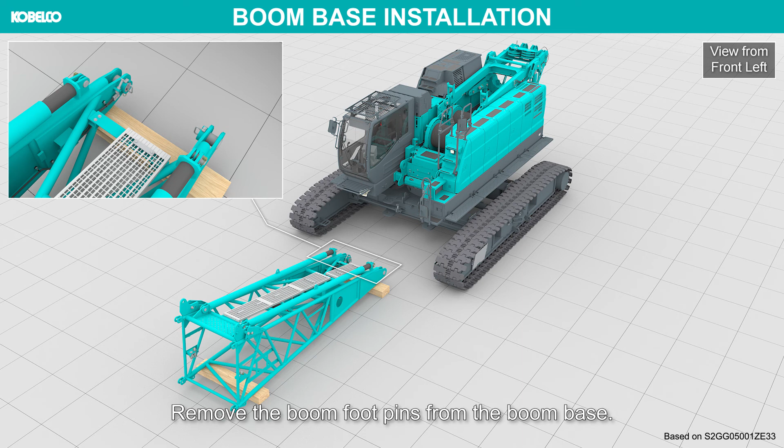Boom base installation. Remove the boom foot pins from the boom base. Apply grease to the boom foot pin holes. Confirm no foreign particle on the pin and pin hole.

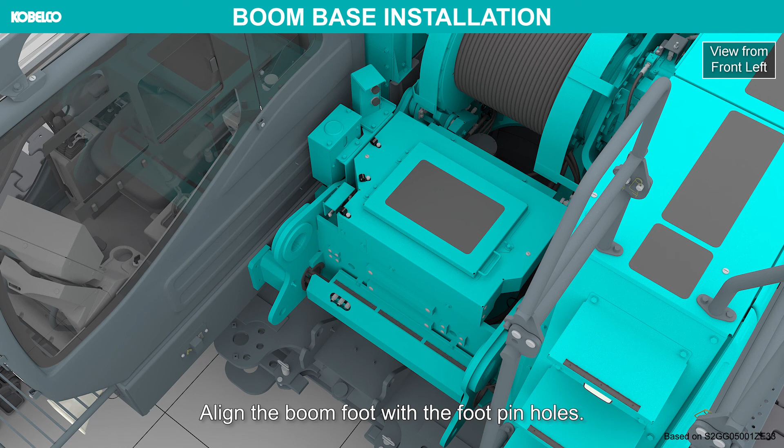Attach the slings to the boom base. Lift the boom base and move it to the base machine. Align the boom foot with the foot pin holes. Insert the shims to the boom foot. Do not use a hammer to insert the shims.

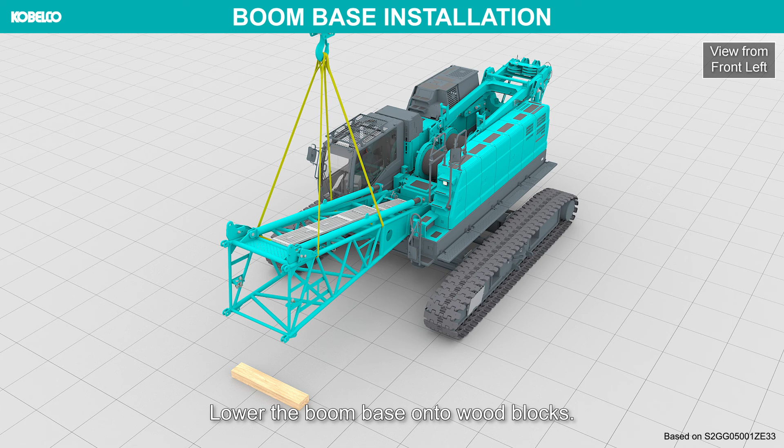Insert the boom foot pins, followed by the securing pins. Lower the boom base onto wood blocks. Grease the boom foot pins. Connect the cables of the boom base to the junction panel on the upper machinery. Shut the engine off before connecting the connectors.

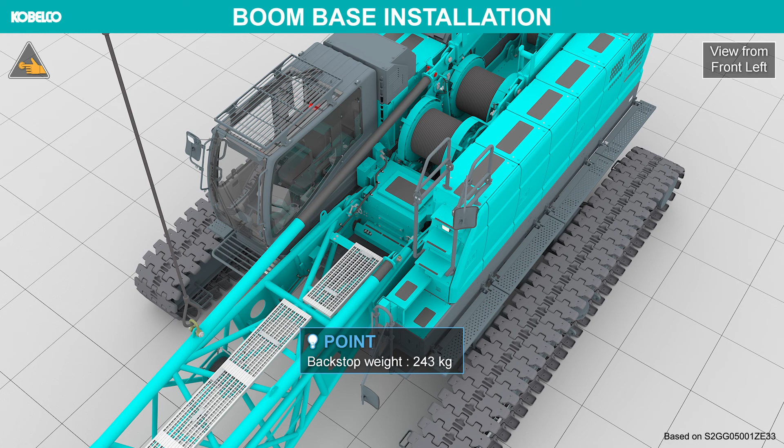Lift and hold the backstop with the assist crane, and remove the securing pins. Pull out the backstop and couple it to the swing frame. In the same way, connect the opposite side backstop. Set the upper spreader on the gantry.

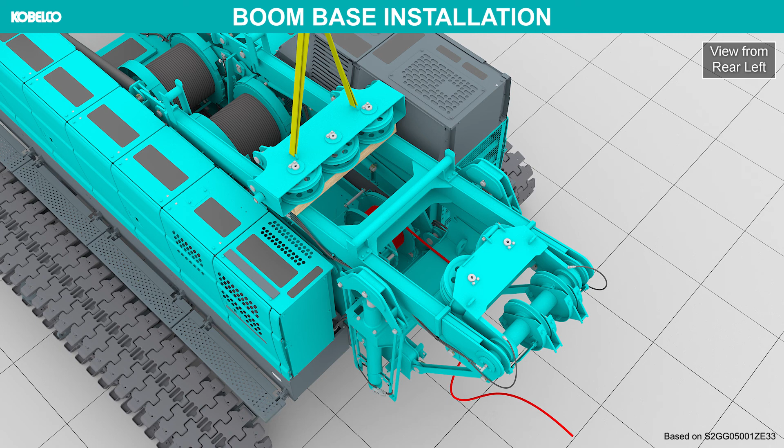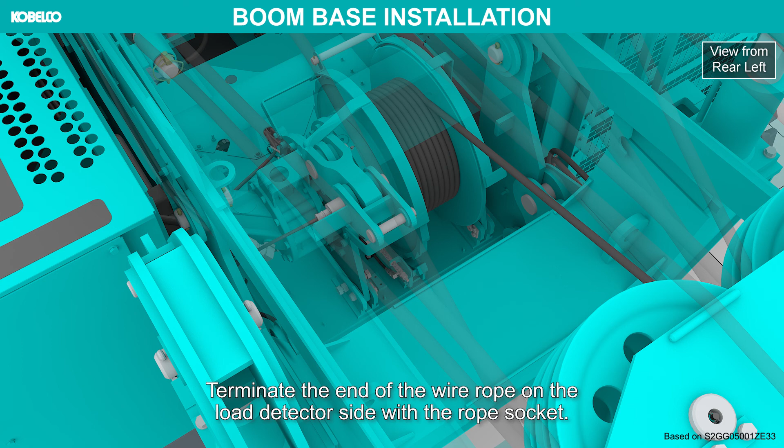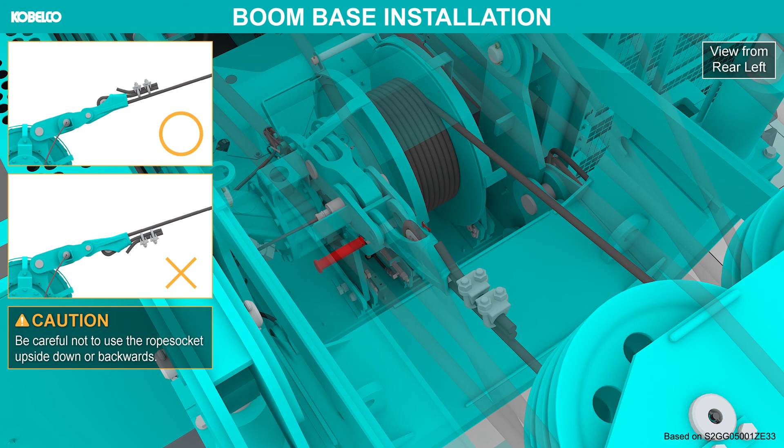Pay out 30 meters or more of the boom hoist wire rope. Be careful not to dirty the rope. Reeve the boom hoist wire rope. Reeve the wire rope in the proper sequence. Terminate the end of the wire rope on the load detector side with the rope socket. Be careful not to use the rope socket upside down or backwards.

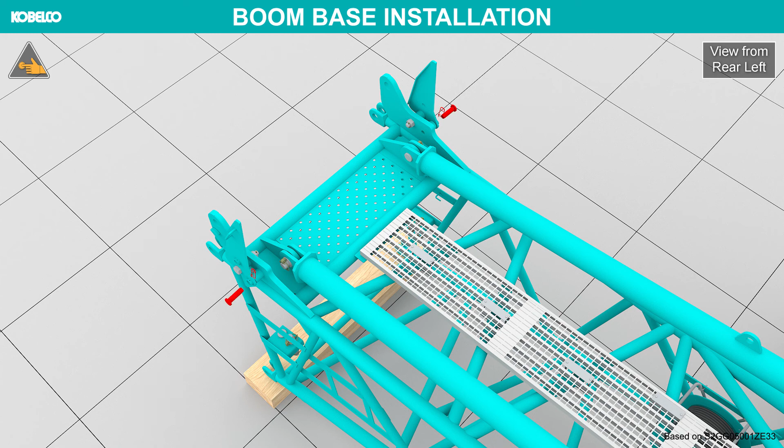Raise the spreader guide. Operate the boom hoist drum with the upper spreader suspended directly above. Operate the boom hoist drum carefully so as not to cause rough spooling. Move the upper spreader to the spreader guide.

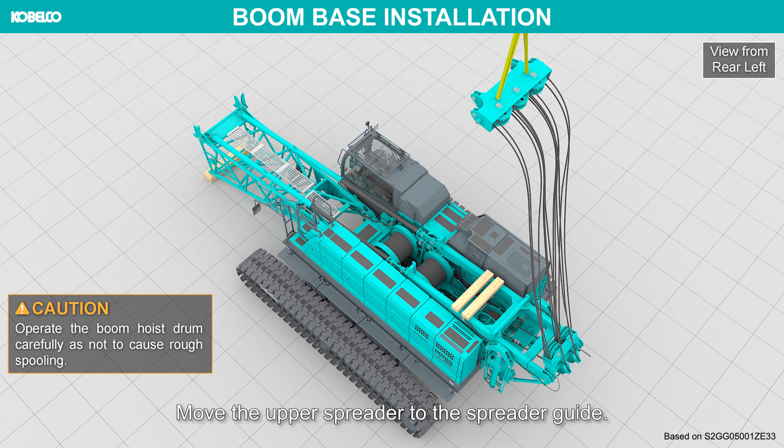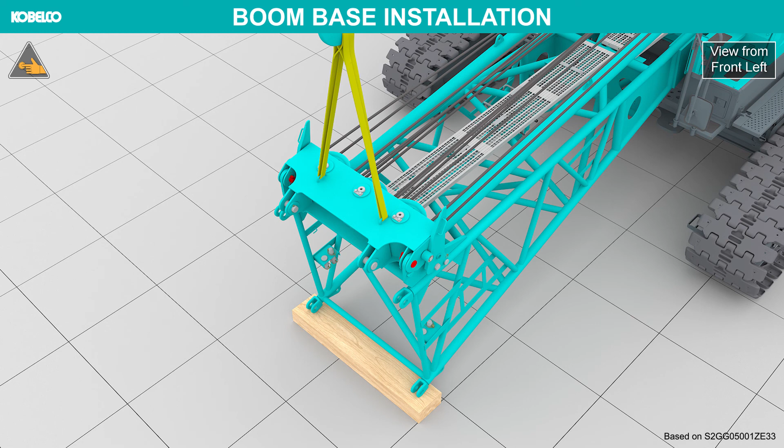Remove the securing pin. Use the spreader guide to stow the upper spreader and insert the securing pins. Detach the slings.

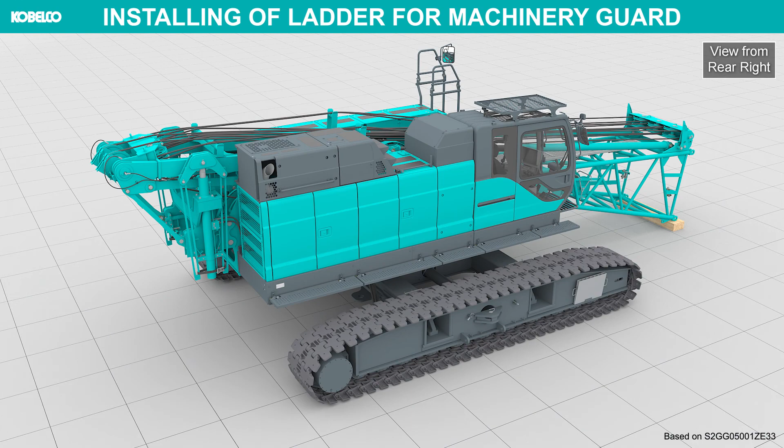Installing of ladder for machinery guard. Insert the ladder in the pipe on the machinery guard, then turn the ladder towards the upper machinery. Insert the securing pins to lock the ladder in place.

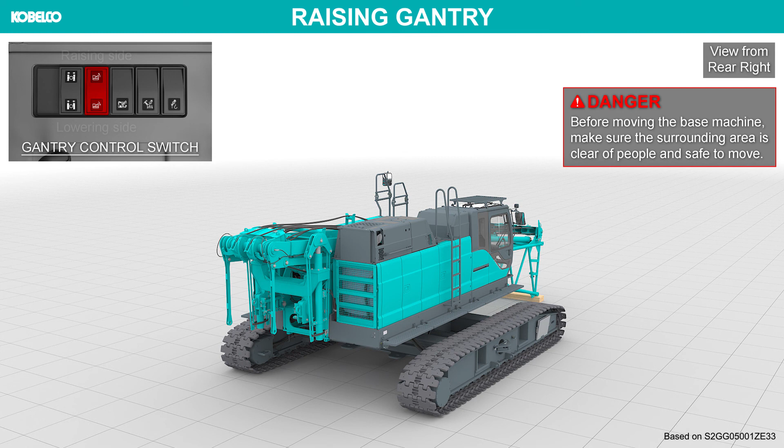Raising gantry. Remove the securing pins to free the links. Before moving the base machine, make sure the surrounding area is clear of people and safe to move. Operate the gantry control switch to raise the gantry.

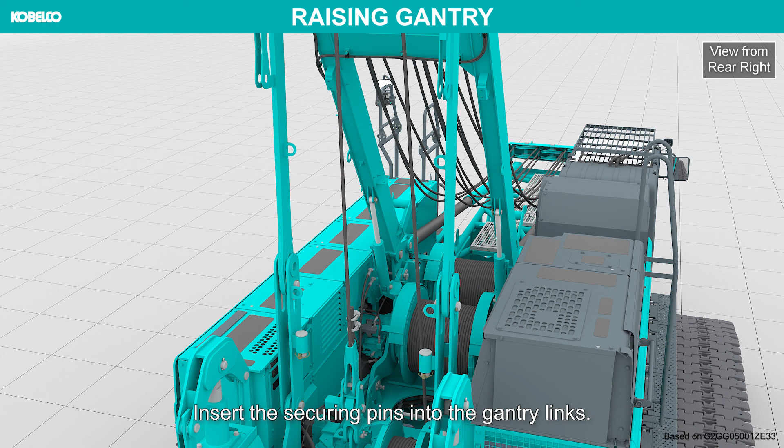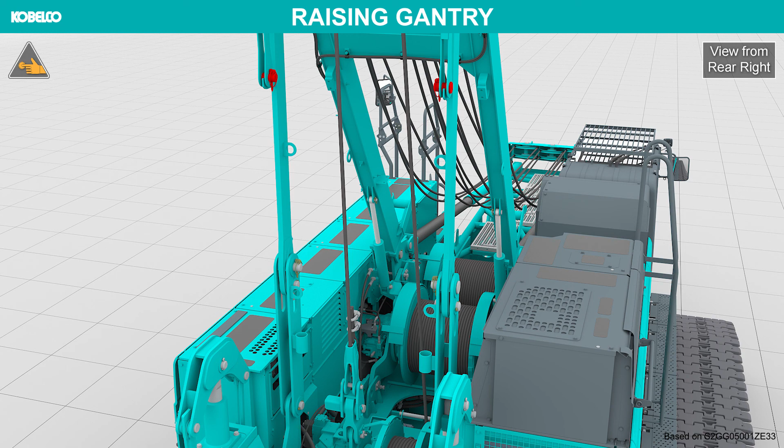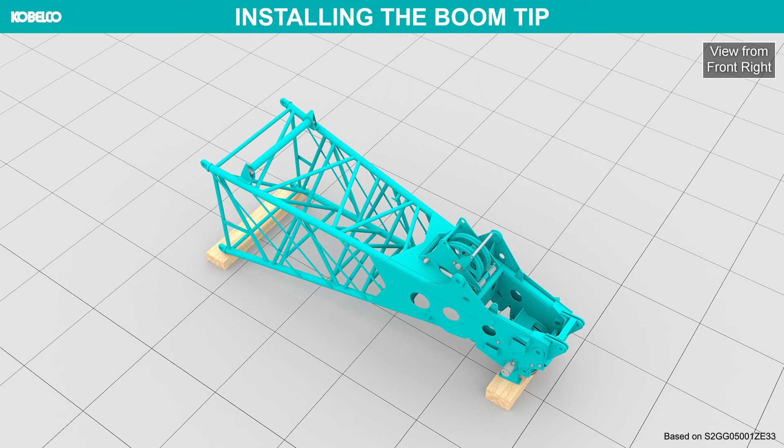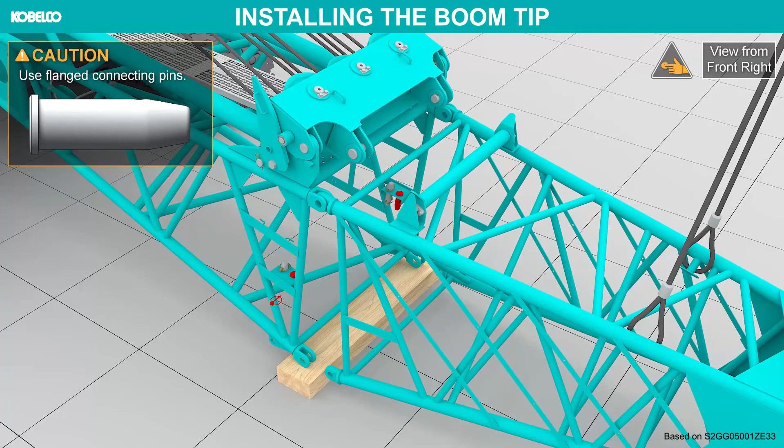Installing a boom tip. Attach the sling to the boom tip. Lift the boom tip and place it near the boom base. Align the top side pinholes. Use flanged connecting pins. Keep fingers out of pinholes. Insert the connecting pins into the top side pinholes.

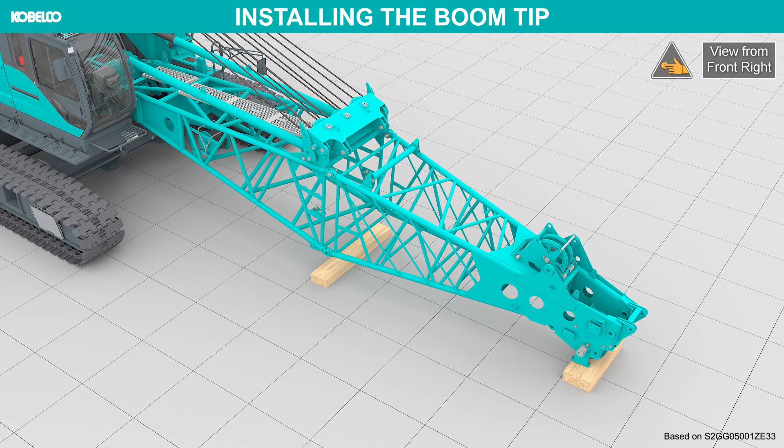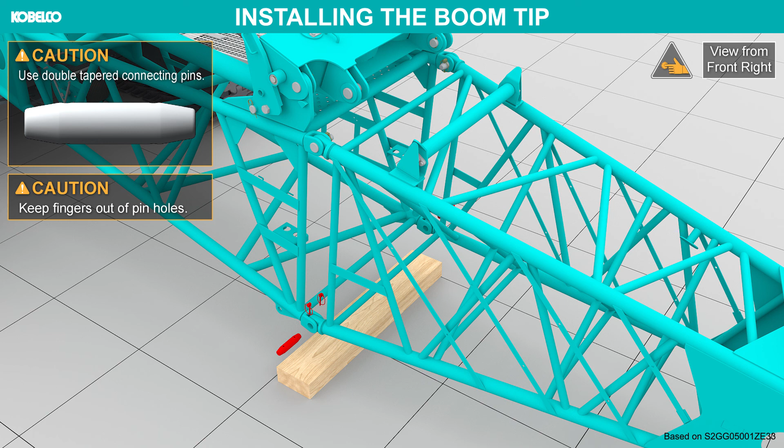Detach the slings. Hoist the boom drum to align the bottom side pinholes. Do not stand on or enter under or inside the attachment being assembled or disassembled. Use double tapered connecting pins. Keep fingers out of pinholes. Insert the connecting pins into the bottom side pinholes.

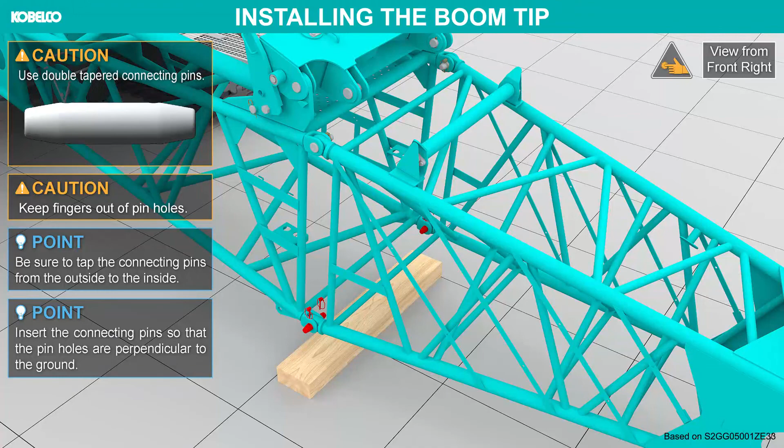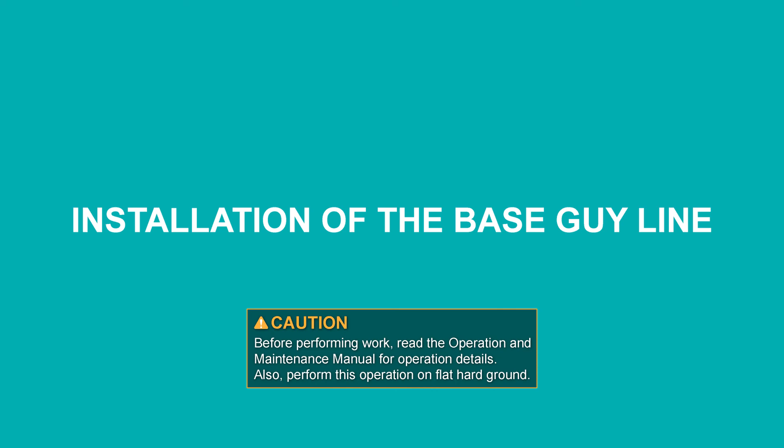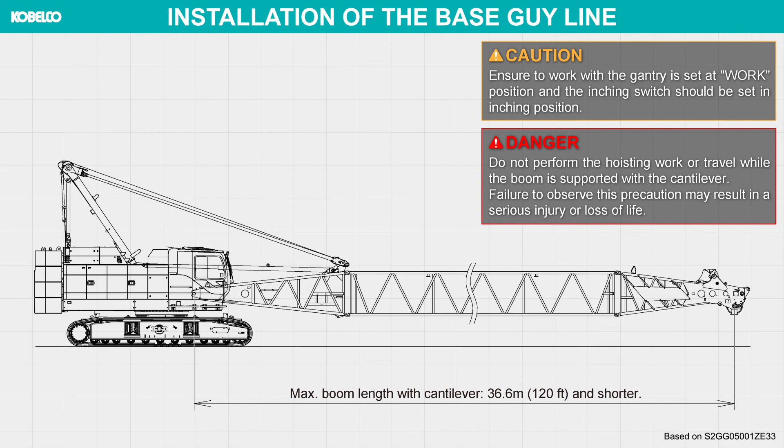Installation of the base guy line. Ensure to work with the gantry set at work position and the inching switch set in inching position. Do not perform the hoisting work or travel while the boom is supported with the cantilever. Failure to observe this precaution may result in a serious injury or loss of life. Watch the boom hoist drum and rope during boom operation so as not to cause rough spooling.

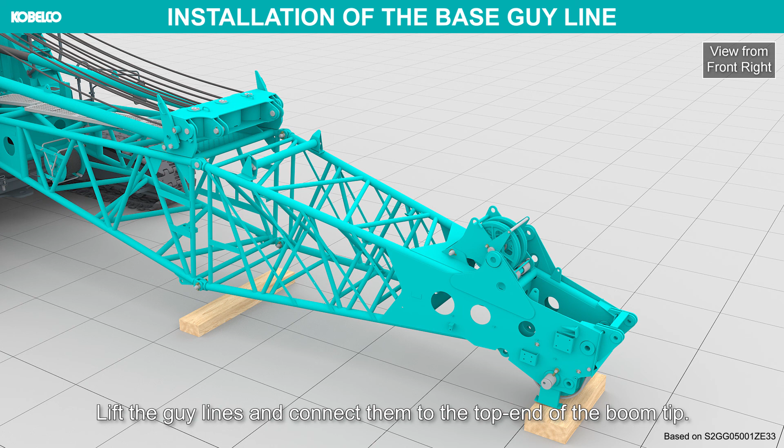Pay out the boom hoist wire rope. Lift the guy lines and connect them to the top end of the boom tip. Spread the split pins 60 degrees apart, 30 degrees to each side. Do not bend just one side 60 degrees.

Guide the guy lines as necessary, so that they do not droop to the side of the boom. Lower the guy lines onto the boom. Keep the guy lines as straight as possible on the boom. Connect the guy lines to the upper spreader. Insert the guy line connecting pin from the inside.

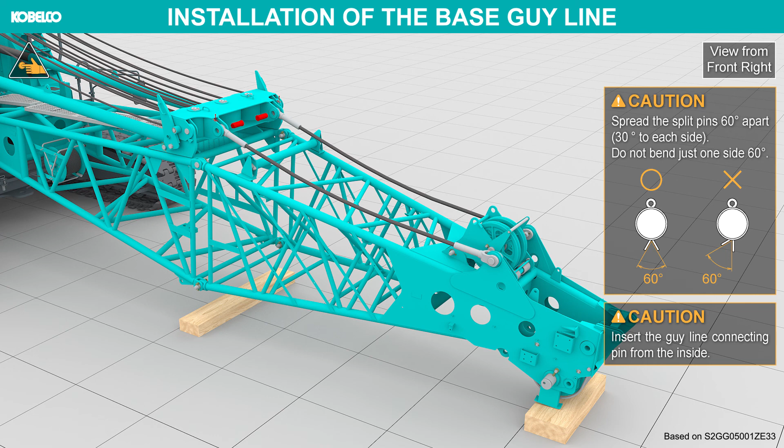Remove the securing pins from the upper spreader. Hoist the boom hoist drum to lift the upper spreader slightly. Insert the securing pins into the upper spreader. Hoist the boom hoist drum further to draw the guy lines taut.

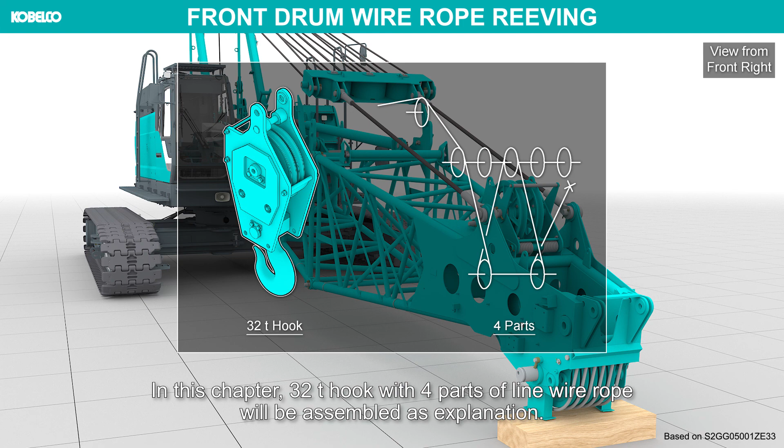Front drum wire rope reeving. In this chapter, a 32-ton hook with 4 parts of line wire rope will be assembled as explanation. Swing the upper machinery and set the hook block, weight of over hoist limit switch and socket on the ground. Set the hook block so that it is in a straight line with the point sheave.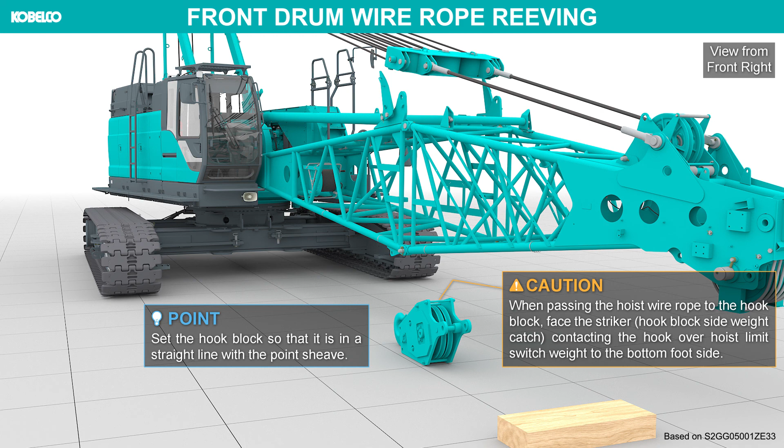When passing the hoist wire rope to the hook block, face the striker, hook block side weight catch, contacting the hook over hoist limit switch weight to the boom foot side. Swing the upper machinery back over the hook. Pay out the front drum wire rope.

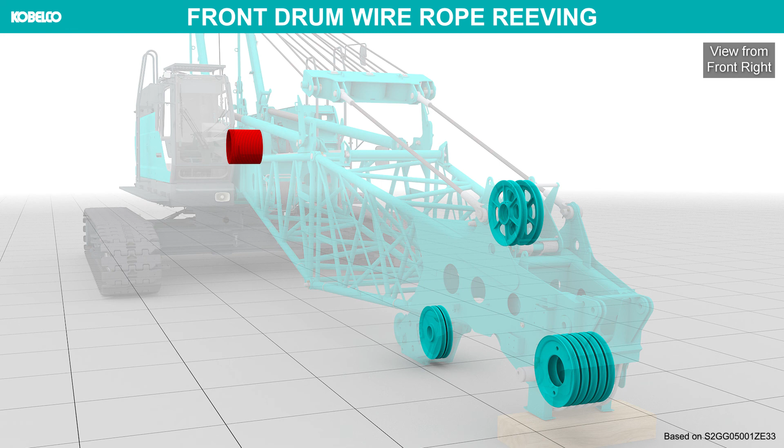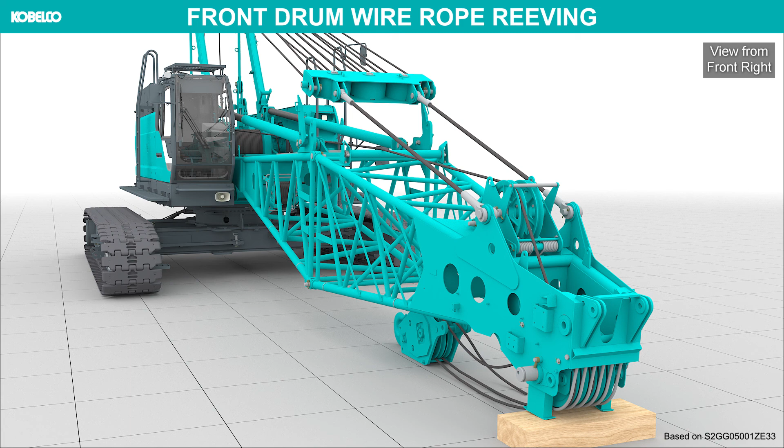Pass the wire rope through the idler sheave and boom point sheave. Be sure to pass the wire rope through the sheaves correctly. Pass the front drum wire rope through the hook sheave and boom point sheave in order. Install the limit switch and pass the wire rope through it. Install the rope socket and secure the end of the wire rope to it. Install the rope socket in the correct direction.

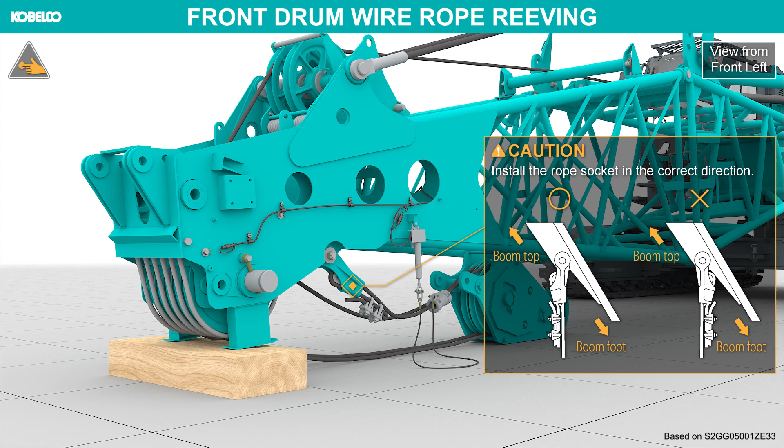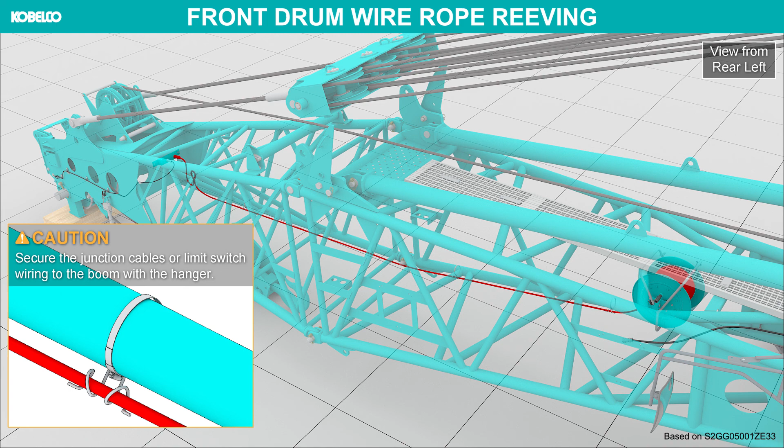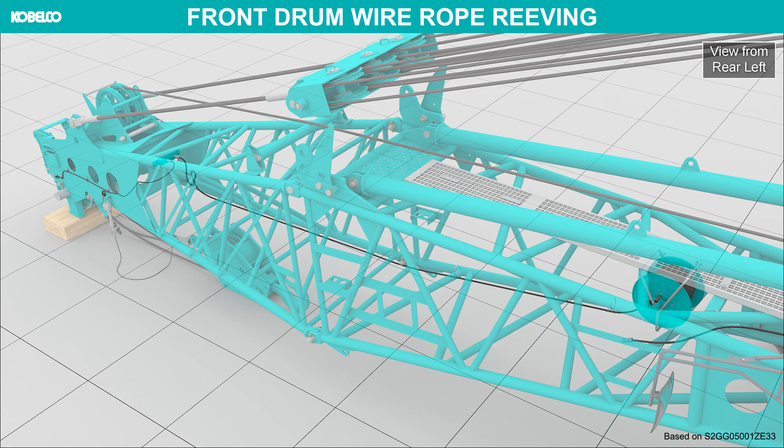Pay out the electrical cable from the cable reel. Secure the junction cables or limit switch wiring to the boom with the hanger. Connect the cable to the boom tip junction panel. Engage the cable reel stopper once having paid out enough cable. Connect the cable from the upper machinery junction panel to the cable reel. Check the connection of the load detector connector.